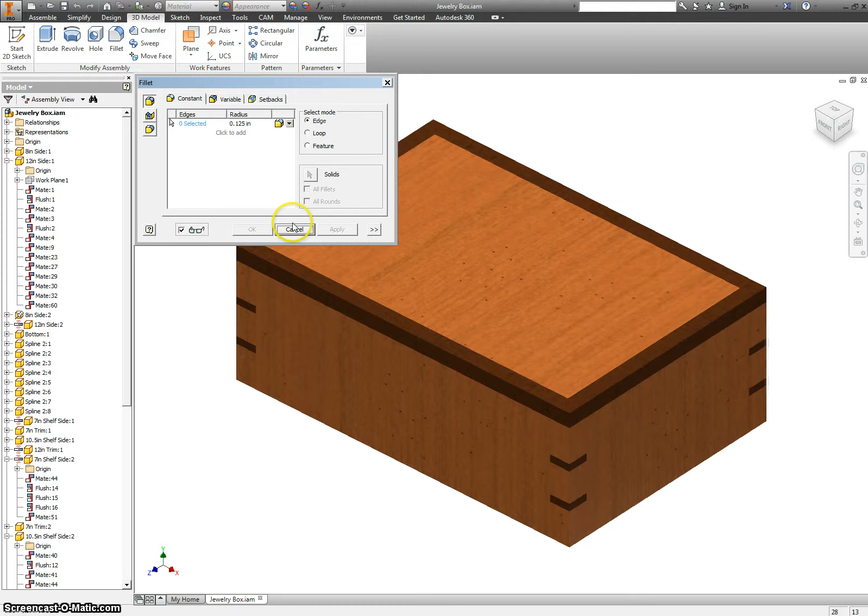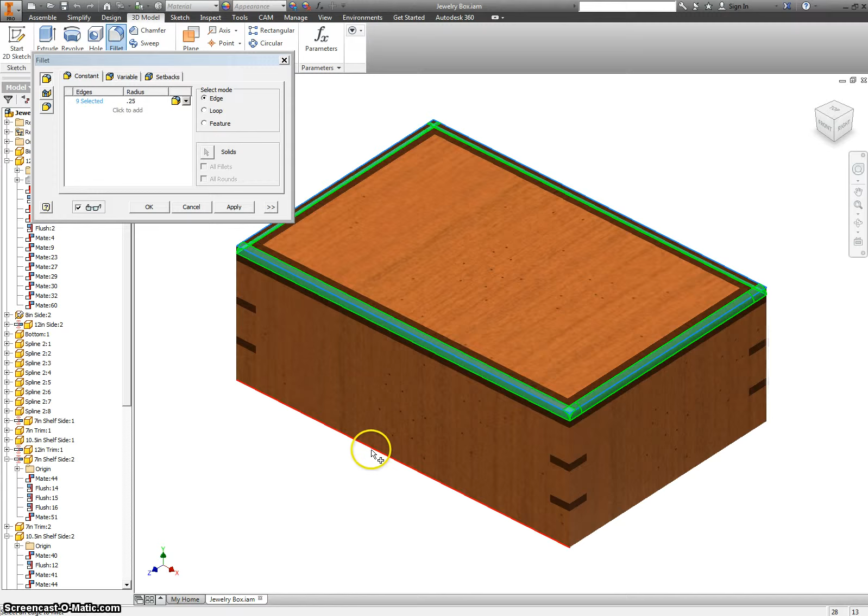We're going to add fillets to the trim on the top and the bottom. Let's see what quarter-inch fillets look like. If we do 0.25, and then click on our edges here, and on the bottom edges we'll have to rotate this guy around, and say apply.

Okay, and what you should see is a nice rounding over of all of the edges. This is called a fillet when you round over an edge. You do this on the router in the wood shop.

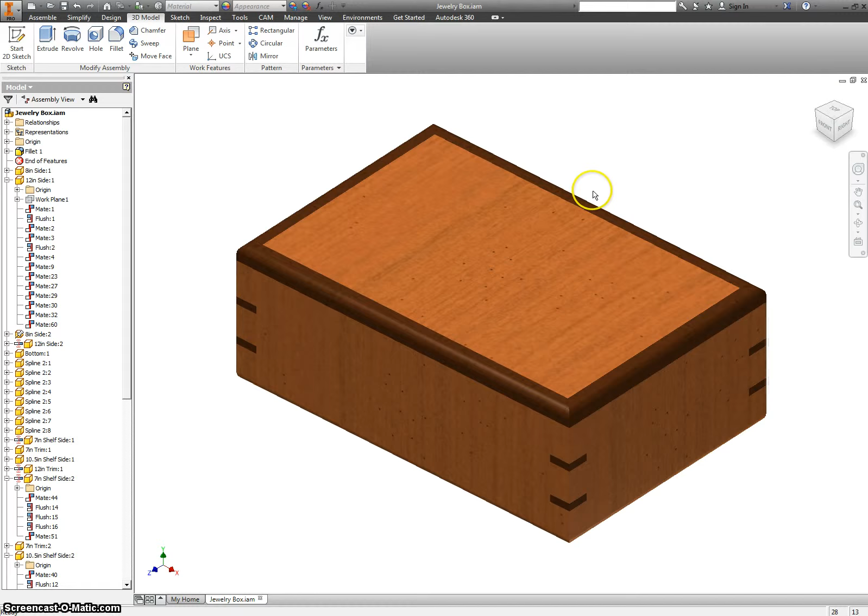Now that we have that done, let's go ahead and instead of making the drawings, let's skip over to a presentation view. So let me make sure this is saved because we just made a change. Now I'm going to go New, Presentation.

Just like with the other projects, you always start with the thing in the top left corner. This time it's Create View, and because we're in a project file, Jewelry Box is the only assembly that's in the file that we're working with. So I click OK.

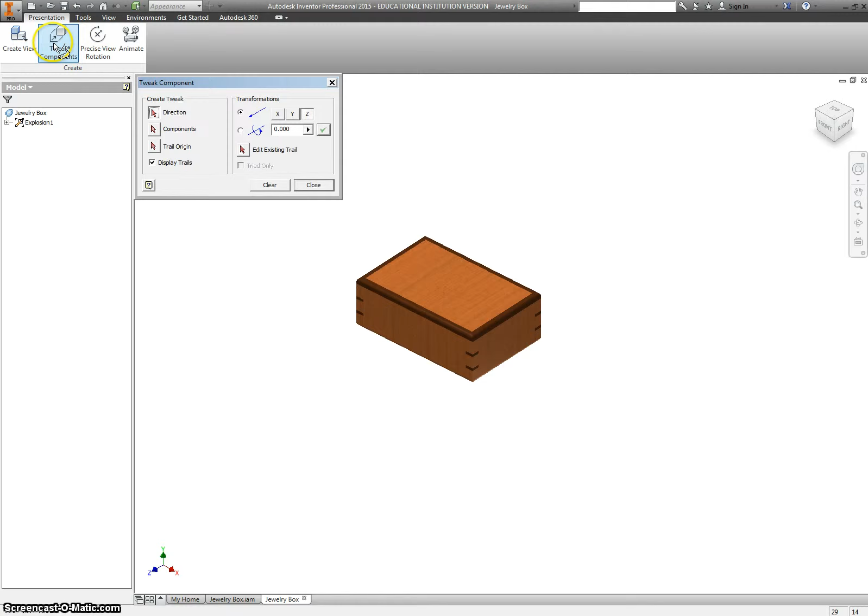And we want to do Tweak Components. I'm going to click somewhere to place a vector. Then we have the option to move objects in the X, Y, or Z direction. I'm going to choose the X direction, and I'm going to grab this trim piece.

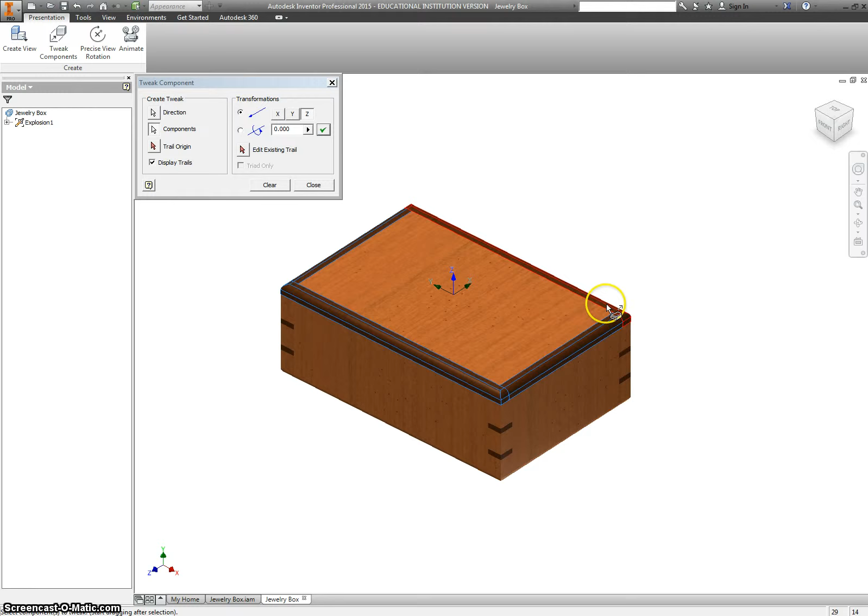You know what? Let me cancel that. Let me put a vector down. I'll move in the Z direction first. Let's just take the whole lid off. So I'm going to click on the 4 trim pieces and then click and drag the middle piece up. You can't just click it because that'll then select the thing that's under it. So I'll drag that up and hit clear.

Put another vector down. Now I'm going to go through and explode this out. So I do want to move in the X direction now. I'll drag this 1 inch. I'll do the same kind of thing here. Oh, have to hit clear in between. Boom, X, click and drag. Make that exactly 1 inch.

Click, this time in the Y direction. Drag, change that to 1 inch. And same thing here, 1 inch.

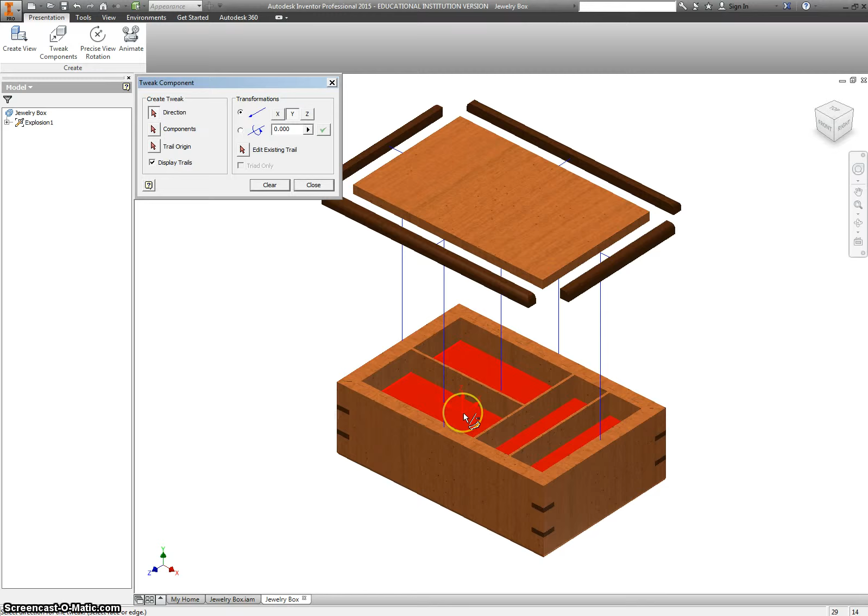Okay, then I want to lift this shelf out. So I'm going to put my vector down somewhere, and I'm going to pick my 4 side pieces, 1, 2, 3, and 4, my inside pieces, 1, 2, and 3, and then I have to click and drag this bottom piece up. And already I can tell I should have lifted up the other part a little higher.

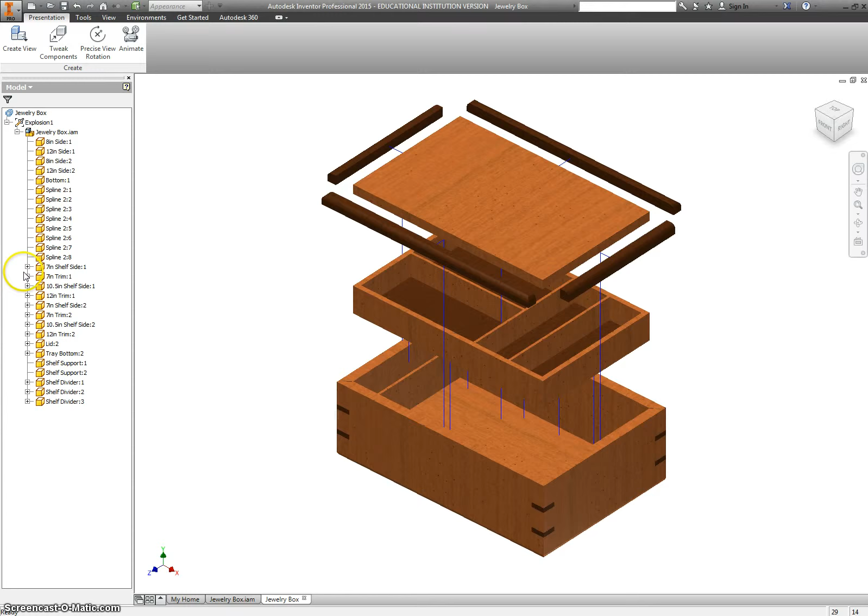So let me hit clear. Let's close this out. I'm going to go to my exploded view, jewelry box, and the whole lid is not shown as a subassembly, so that's unfortunate. But let's see if we can find just the lid.

This went up 10. Let's see if we can make it 15 instead. And the trim pieces did not go with it. But if I hover over it, it'll tell me where it is over here. So let's make this 15.

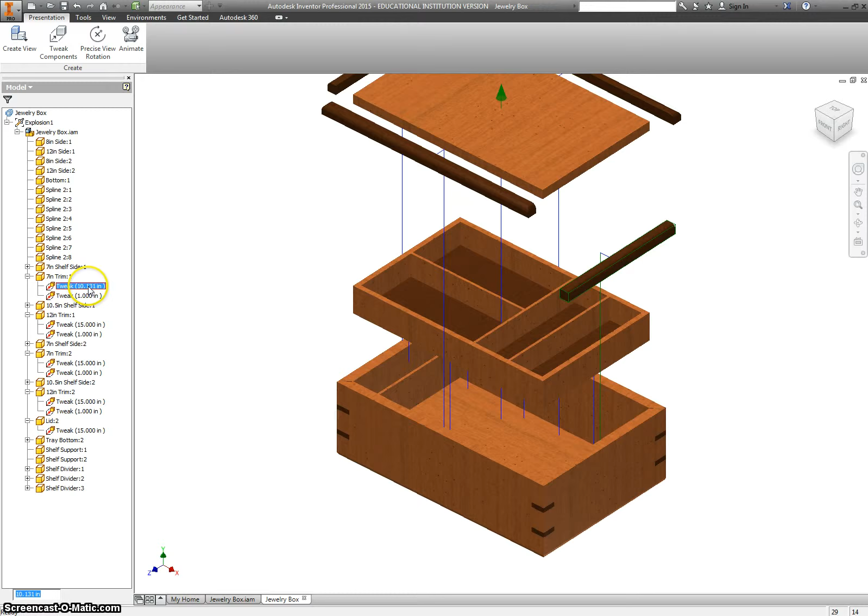My 7-inch trim we can make go up 15. Another 12-inch trim piece. And the last one, where is this? There it is. Alright, so now those are up a little bit higher. Looks nicer. Okay.

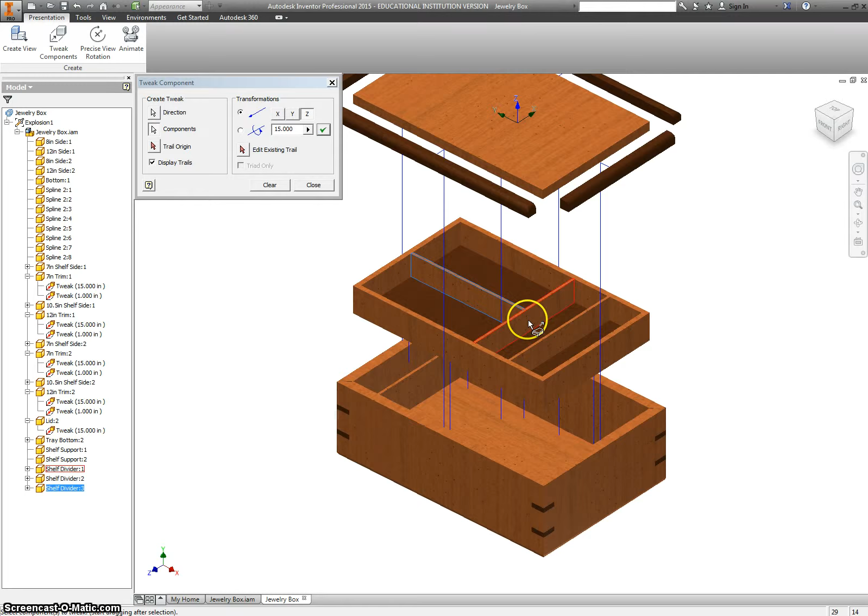Let's pull all this apart then. So we'll go back to Tweak Components. We'll click, it doesn't matter where you click. This is just telling you what direction you're going to start pulling stuff. And yeah, let's go and pull all of these dividers straight up, a little bit higher. Okay, we'll make that exactly 3 inches.

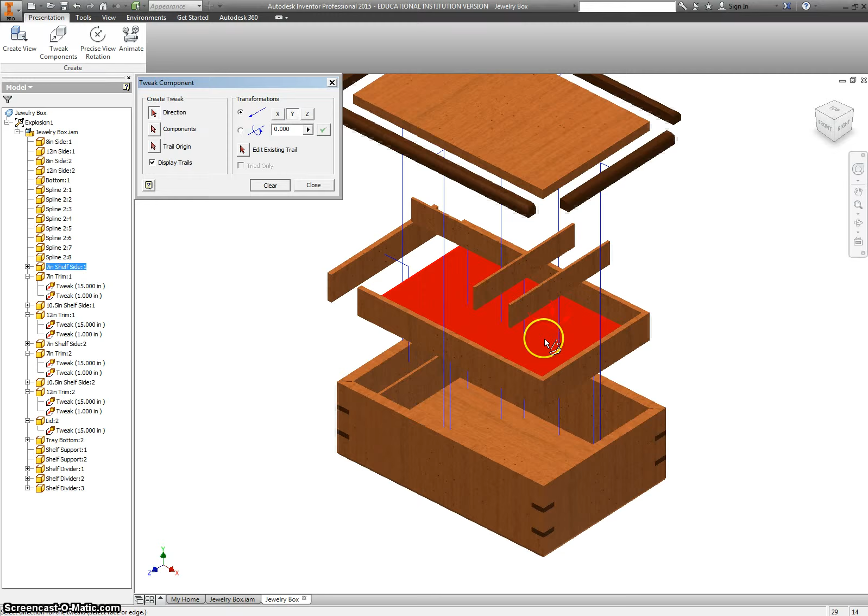Place another vector. This time it can go in the Y direction. We'll drag this out a little bit. Let's go out 1.5. It'll look best if we do the same thing on the other direction. So we'll make that 1.5. Okay, those are all pulled out 1.5.

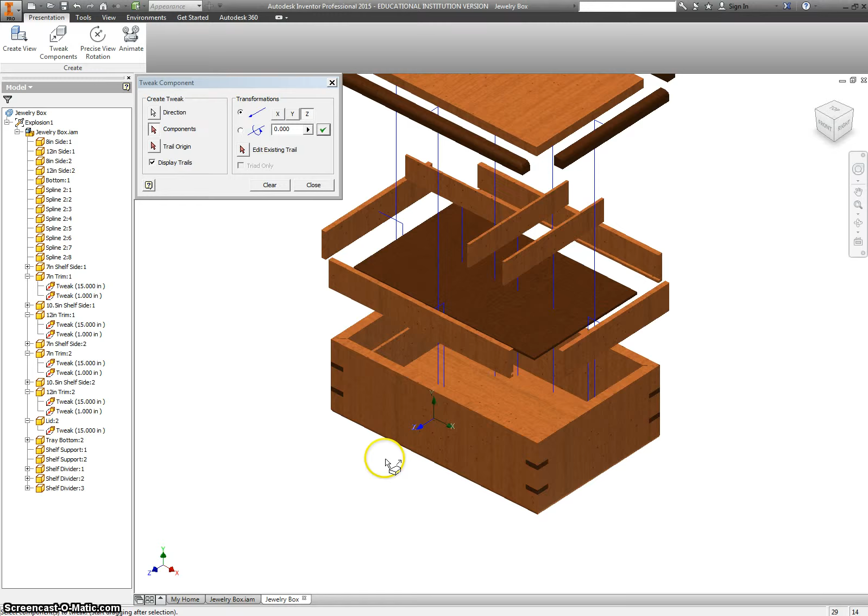Let's go ahead and start messing with the rest of the stuff down here then. So say clear, I'll put a vector down, and I think I'm going to pull all 4 of my splines out. Oh, I forgot to tell it a direction, in the X direction.

I don't know if you noticed, but I was careful to pull from a blank spot on the screen. If I try to go back and grab one of these, I would have grabbed that with it. Let's make that go out 3 inches. We'll do the same thing to the other side.

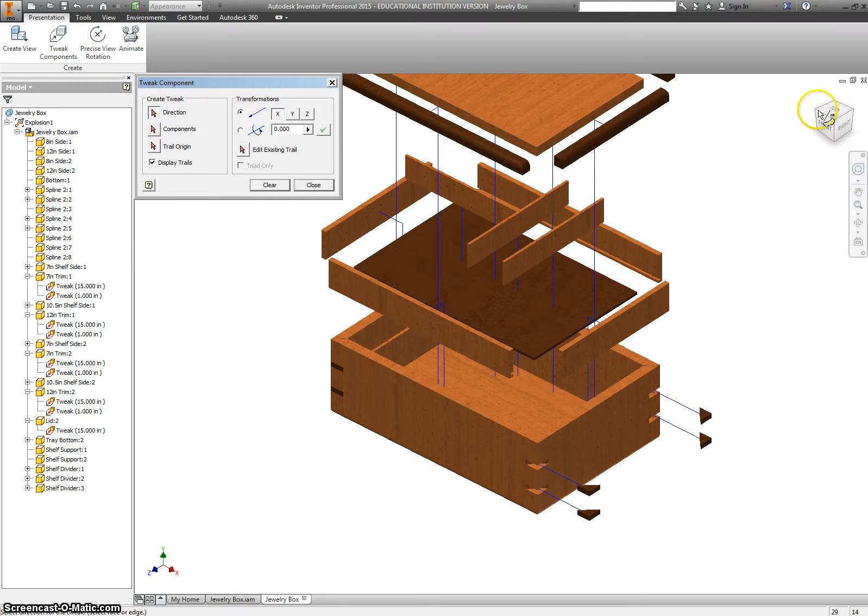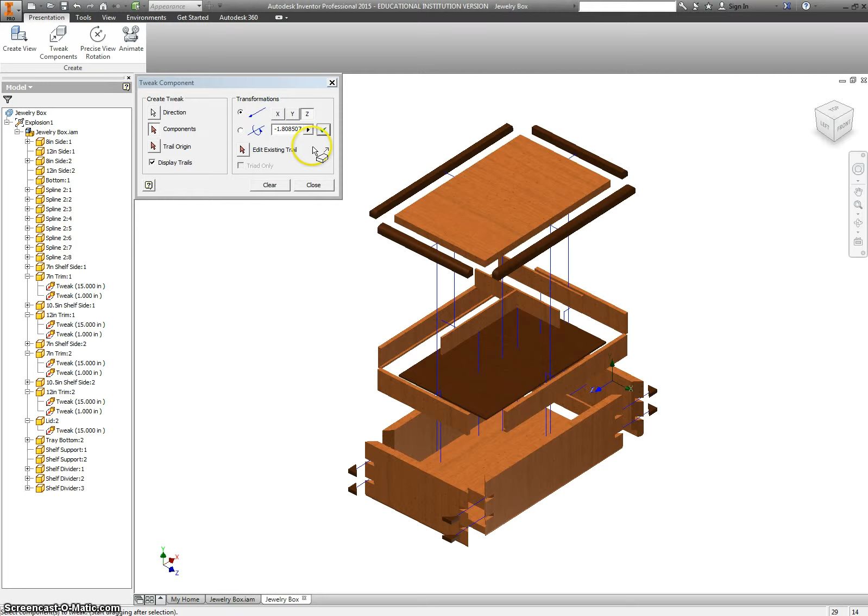Okay, so I'll place my vector. 1, 2, 3, 4, and I didn't click and drag, so I'm going to click over here, make that 3 inches. These sides I can just click and drag. I'll make that 1.5. We'll do 1.5 on all 4 of those.

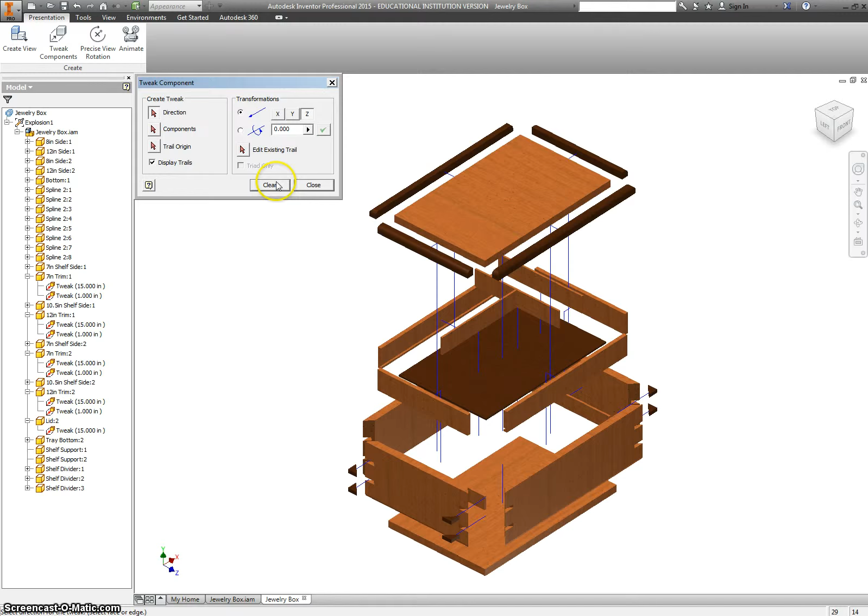We'll drop the bottom down about 3 inches. Okay. Look back at our isometric view or home view.

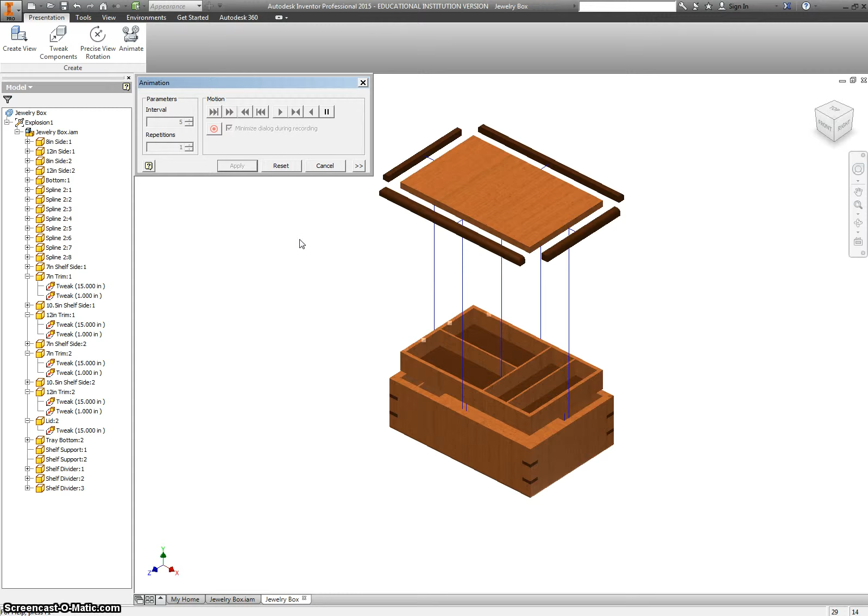Everything looks pretty good. If you want to see how it all comes together, you click animate, change this to a smaller number like 5, hit apply, and then play. This will give you a preview of what you have to do to put the box together, and take it back apart.

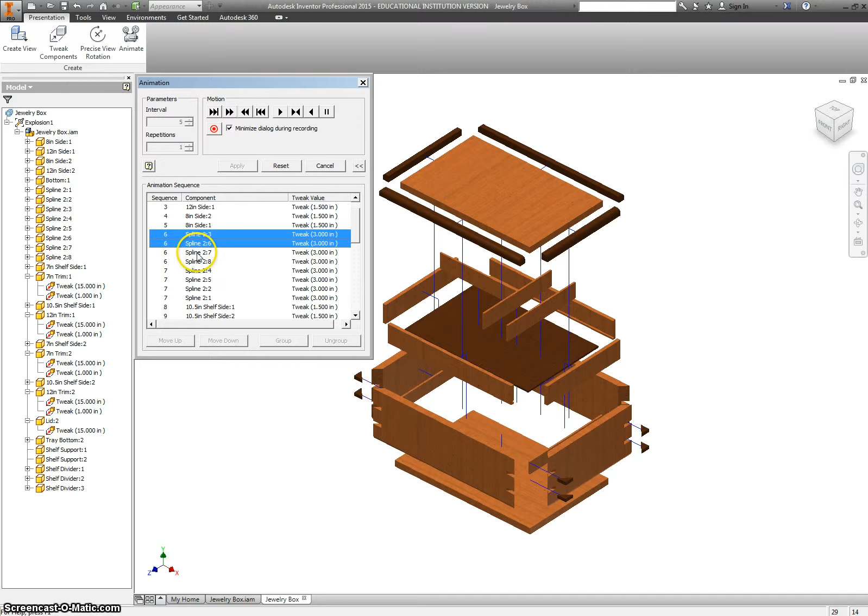And if you really want to get technical, you can change the order of things. If you don't like how it comes apart and goes together, you can group different things or remove certain things. So like over here, the splines, these happen at 6 and 7. I could choose to say all of these. I should be able to say that they're all grouped. No, it doesn't like that though. Oh well. It doesn't matter for what we're doing.

You know what? Let's just go ahead and save this. We'll get ready to do some drawing sheets on the next video. Save, and jewelry box IPN is fine. Say yes to all, because you're modifying all of the files that are in here, and click OK.